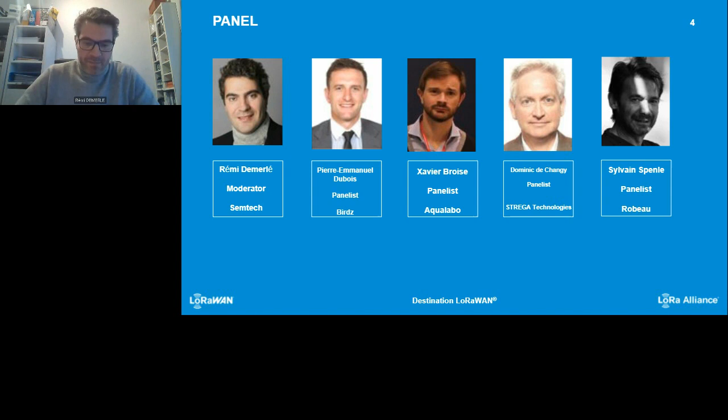Water is a scarce resource for humanity. We are all living on a blue planet, plenty of water, but bad surprise, only less than 3% is pure water. More than this, we think that the most important is drinkable water, but most use of clean water is for food, for irrigation. It's also for energy, also for other washing purposes, etc., in residential or building areas. Last, in industry.

What's wrong with protecting water? What are we doing wrongly? What is the urgency? What do we have to change? That's exactly the point addressed by the United Nations when listing the Sustainable Development Goals for humankind. They call the world to change for safer and more affordable drinking water for all by 2030.

We must realize the fact that 80% of wastewater is untreated, and still 844 million people lack access to drinkable water and sanitation.

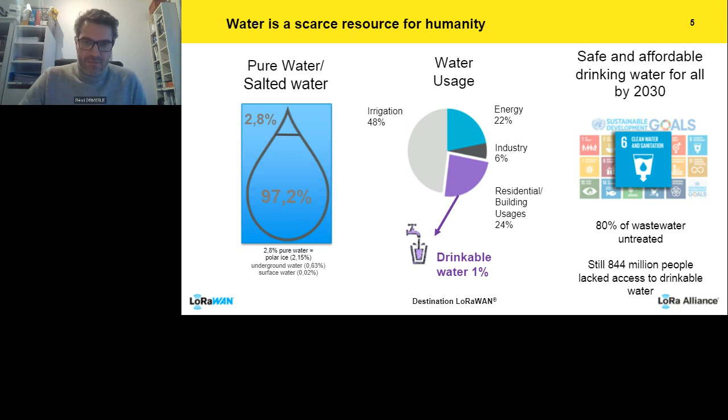So in the next 15 years, if we don't change, this number will increase and reach up to 3 billion. How can technology like LoRaWAN for connecting IoT sensors help us to change that? That's one of the reasons why LoRa was designed for providing better performance to low power water meters used in metering for water, but also for gas and other utilities.

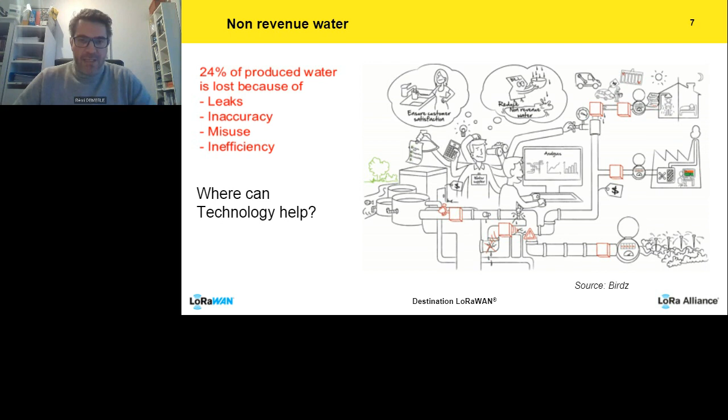Where again can we change and improve this? Through, let's say, an artificial water cycle, not the hydrological one, we try to represent how IoT in different key points can impact for the best the use of water sensors, such as quality sensors for pumps or other pollution control systems or metering systems, water leak detection, etc. All types of new sensors can then profit utilities to improve efficiency.

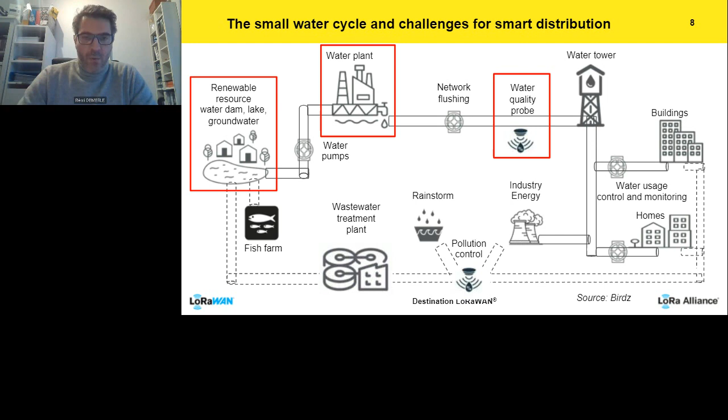Without more delay, let's look at the solution provided by one of the most important players in the sector of water supply, the company Birdz of Veolia.

Thank you very much, Rémi, and good afternoon to everyone. My name is Pierre-Emmanuel Dubois. I'm an international business developer at Birdz. So first, if you let me, I'll share a few words about Birdz' activity.

Birdz provides environmental smart solutions for industrial IoT. As a 100% subsidiary of the Veolia Group, Birdz is the IoT digital center, competence center of the group, serving customers such as municipalities, commercial or industrial companies, both inside and outside of the Veolia Group. Our domain of expertise lies in environmental verticals, monitoring on a daily basis environmental data such as water, temperature, humidity, waste collection, or indoor air quality, and many others.

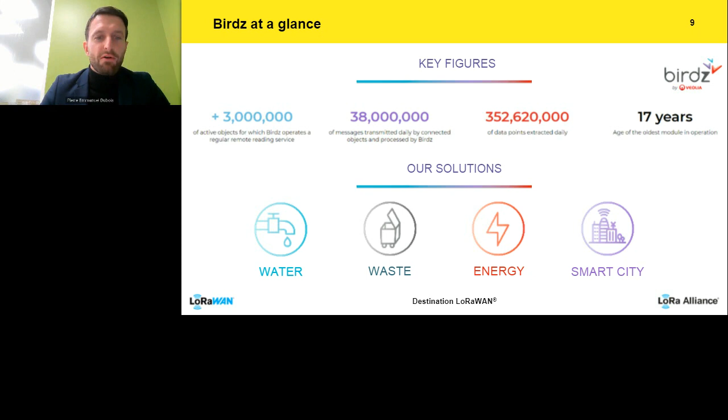We operate more than 3.2 million connected devices every day through various LPWAN technologies, including LoRaWAN. LoRaWAN's fast deployment represents a significant booster for smart water service adoption and enables a more effective water service at a managed cost. Currently, Veolia and Birdz are deploying in France over 3 million smart water sensors in the next 10 years on a public LoRaWAN network through Orange and powered by Actility.

Before going any further, let's have a quick look at a water network and all the process from raw water resource to water consumption. This is called the small cycle of water, which Rémi was introducing earlier.

Step one, the source itself. The water usually comes from surface water like lakes, rivers, or reservoirs, but sometimes it can come from groundwater and be pumped up via wells.

Step two is the treatment. The water then gets treated to remove any dirt, chemicals, or organisms that may be harmful to people. This process involves filtration and disinfection to make sure that the water is safe for us to drink.

Step three is distribution. The water is then sent out through the water pipes network to areas of the cities where it is needed. In step four, the quality monitoring helps municipalities ensure a high level of potability, reduces risks on network incidents, and alerts on contamination.

Step five is the storage. So after being distributed and checked for quality control, the water is stored in water tanks before it's used. And finally, the use, and that's how the water arrives in our taps and showers.

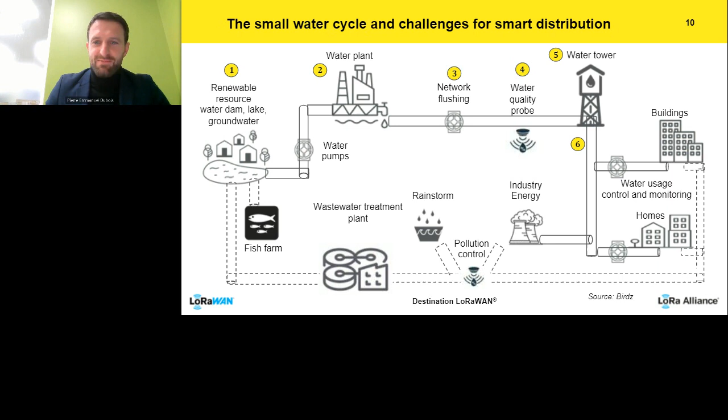How to measure water quality, and how? KAPTA, which you can see here, is Birdz's smart water quality solution.

Monitoring water quality is crucial for water utilities and municipalities, as they have a commitment to permanently deliver a high level of water quality from production to end consumer. The World Health Organization has defined key parameters for the monitoring of drinking water, including conductivity, absolute pressure, temperature, active chlorine, and others.

Why measure water quality? Well, first, to ensure a constant high level of water quality from production to end consumer. Second, to improve the management and the monitoring of the drinking water supply. Third, to reduce the impact of water network incidents. Fourth, alert on contamination. And finally, supervise critical locations as a stepstone for city resilience.

KAPTA is deployed in 12 countries worldwide and protects in France only around 8 million people. KAPTA has been rolled out for large international events or venues such as Euro Disney in Paris for the COP21, and in London in the 2012 Olympics.

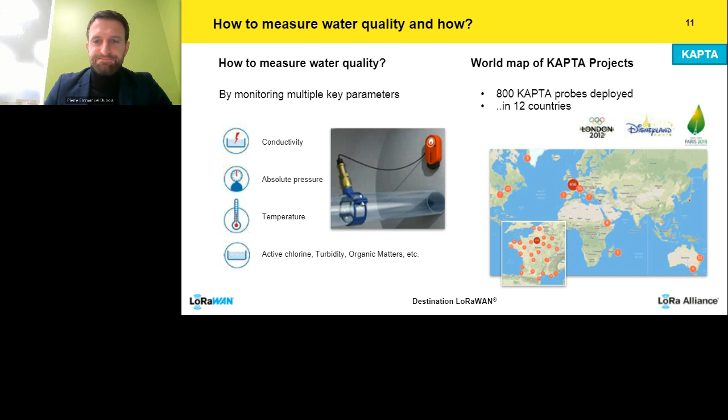The Swarm system is an innovative solution by Birdz for monitoring the quality of surface water. Currently, if you wish to monitor water quality, a sample usually is taken and sent out to labs with the results coming within 3 to 4 days. Swarm, on the contrary, allows you to monitor water quality in real time.

The buoy measures the water quality parameters and transmits data in real time for analysis. On top of the measuring system, the buoy comprises an anchor, a float, and an energy generating module allowing self-sufficiency. The buoy can be installed directly and easily on any type of surface water.

Using the Swarm system, the water supplier can continuously monitor changes in the 7 parameters for the quality and condition of surface water. Hence, deploying Swarm is a guarantee for municipalities to protect the assets of surface water resources, rapidly detect the variation in water quality, limit the economic impacts of any type of pollution, and secure the water resources against

accidental contamination or malicious acts.

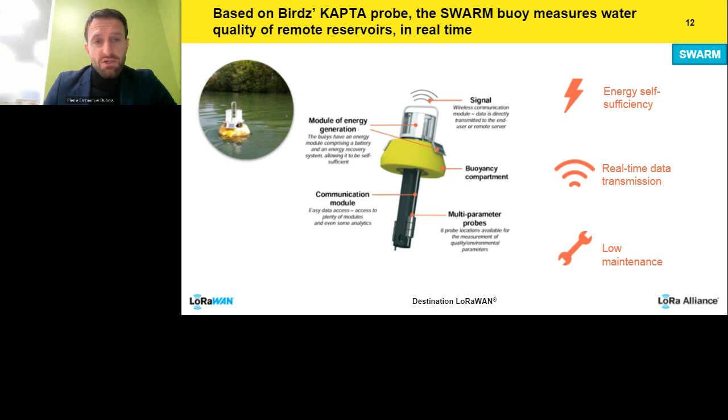Let me emphasize the experience of the Swarm project deployed in Coliban Water in Australia in 2018. This project had 2 objectives. Objective 1 was to measure in real time the blue-green concentration in the reservoir. The second objective was to optimize the downstream water treatment.

The trial with Coliban Water was mainly about testing the buoy in harsh conditions, and it came out with very positive outcomes. First, the model self-learned to account for oxygen evolution at daytime and nighttime. Second, the model has also been able to determine both algal and bacterial concentration.

Moreover, an artificial intelligence model was built to predict how turbidity varies over time, and that model can now predict the turbidity over 30 days. As a consequence, if turbidity increases above the limit threshold, then an increase in chemical dosing is required.

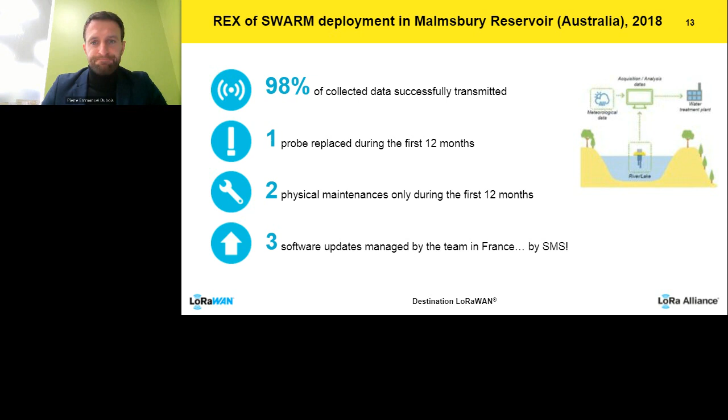In order to support you in the integration and deployment of any LoRaWAN-based IoT project, Birdz has launched to the market an environmental IoT data platform called IoT Drive. IoT Drive is basically a software as a service data integrator and management solution. It is fully agnostic of sensors, regardless of their manufacturers, agnostic of software applications, and of environmental use cases. In other words, it is the Google translator, I would say, of the IoT complexity.

In terms of pricing, IoT Drive comes at a very competitive cost with a yearly subscription fee per device, which is highly competitive compared to alternative solutions. IoT Drive is besides way more plug and play than these alternative platform solutions.

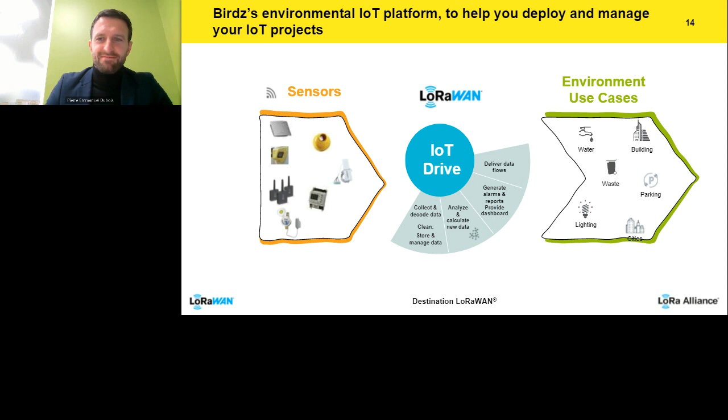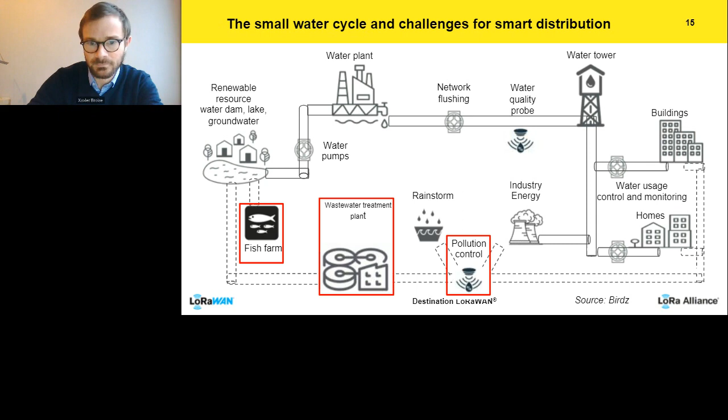Thank you very much, Pierre-Emmanuel, for your explanations about your multi-parameter probe and for this case in Australia. Now let's talk about water quality monitoring and pollution detection for wastewater treatment plants and surface water. So my name is Xavier Broise, and I'm the Vice President of the company AquaLabo. AquaLabo is a manufacturer of smart water quality sensors.

So what are the USPs of AquaLabo sensors? First of all, the sensors are smart. All the intelligence is done inside the sensor. Calibration, compensation, ranges management are done in the electronic of the sensor. So you get a digital signal with a water quality value that you can immediately use for your process.

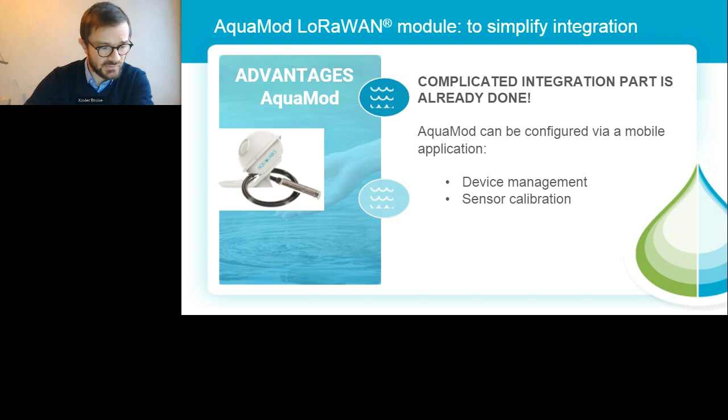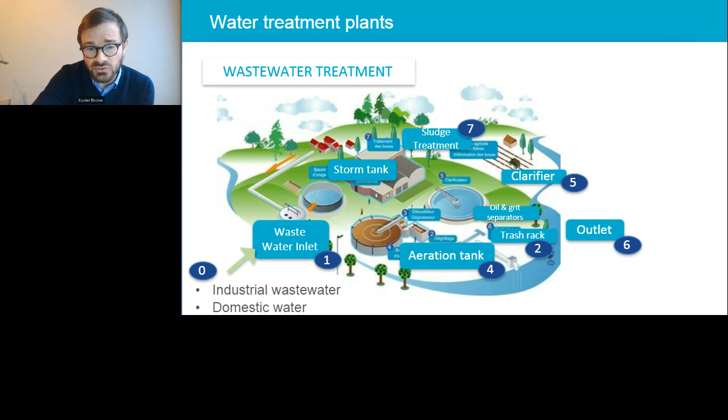So now let's see some application where this package can be useful to monitor water quality. Industrial and domestic wastewater must be treated. As you can see on this slide, the treatment process is composed by different steps. And the challenge is to discharge at the point number 6. So you can see on the slide, the outlet point number 6, a water that fits with the regulation given by the local authorities, and to make sure that you don't pollute the water.

In the process, we will remove the contaminant in the water. So we have physical, biological, and sometimes chemical processes. For each treatment, water quality monitoring is required to optimize and control the process. So for example, in a plant, we will measure dissolved oxygen in order to optimize the blowing system, measure the pH to optimize the dosing of the chemical product.

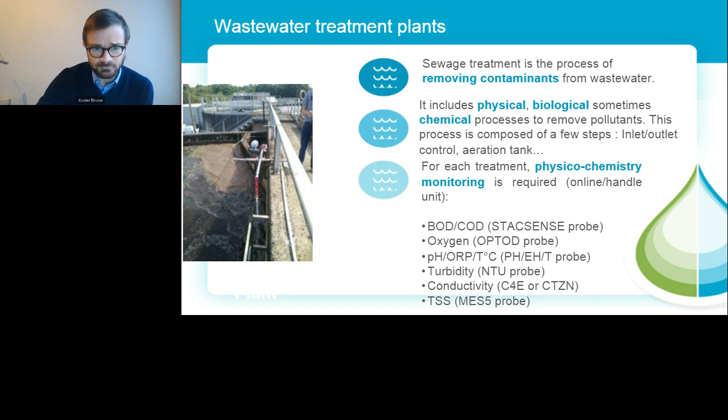Industries also use a lot of water, as we have seen in the introduction, for their processes. And they have two main options for their wastewater management. The first one is to have their own industrial wastewater treatment plant. And the second one is to pay a fee to the local municipal water treatment plant and just send the water to this plant. But in any case, they have to measure the water quality they discharge to prove that they do not pollute. So the rules are different in each country.

For example, in India, CPCB regulations impose the water to monitor some water quality parameters, and this organization has fixed some target values to be reached. At the beginning, in India, this administration was targeting the biggest industry. Now, step by step, they also target smaller industries. So the market for water quality monitoring for industries in India is bigger and bigger.

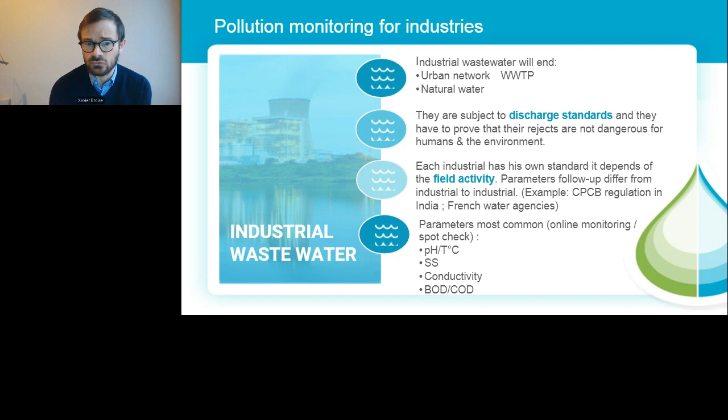In Europe, we have some water agencies. We can call them also police of the water. And each industry must find an agreement with the administration according to their activities, according to the volume of water they discharge, about the monitoring they have to do. So sometimes they just need to install a very simple stationary sampler and take some sample and go to the lab. But sometimes they also have to measure water quality online.

Another very interesting market is fish farming and aquaculture. This market is booming at the moment, and fish farmers may need our technologies for 3 reasons. The first one is to optimize their production process. They need to keep a certain level of oxygen in the water for the fish, and they need to optimize the feeding system. So they will monitor dissolved oxygen and turbidity in order to save energy costs and feeding costs, which are 2 major expenses in a fish farm.

The second one is that a fish farm becomes like an industry because they also create pollution. So more and more, they have to prove that they do not pollute, and they have to monitor their wastewater. And the last point is about the security of the site.

Fish farmers can lose all the production they have and lose all the fish. For example, in the summertime, when the temperatures are very high, the dissolved oxygen in water goes down. So they may need an oxygen sensor connected to a LoRa system to send an alarm, SMS, or an email in case the dissolved oxygen level in the tank is too low.

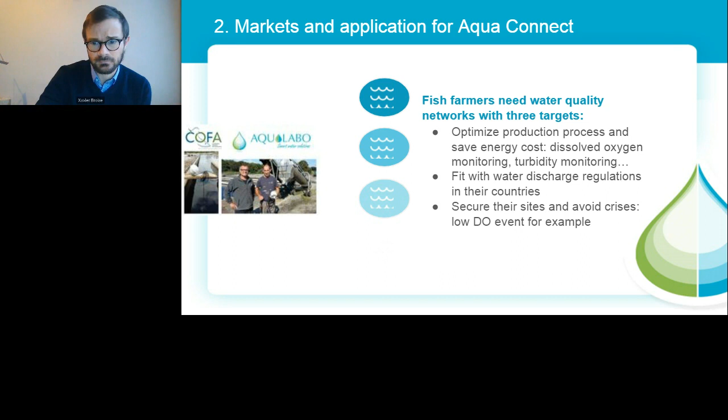Last application is about surface water. As we have seen in the introduction, surface water is sometimes used to produce drinking water. So when civil engineering companies are working in a river, what they do more and more is control. For example, if you build a bridge crossing a river, or if you do a dredging campaign in a canal, you must measure turbidity before and after the work to make sure it doesn't have a bad impact on the environment.

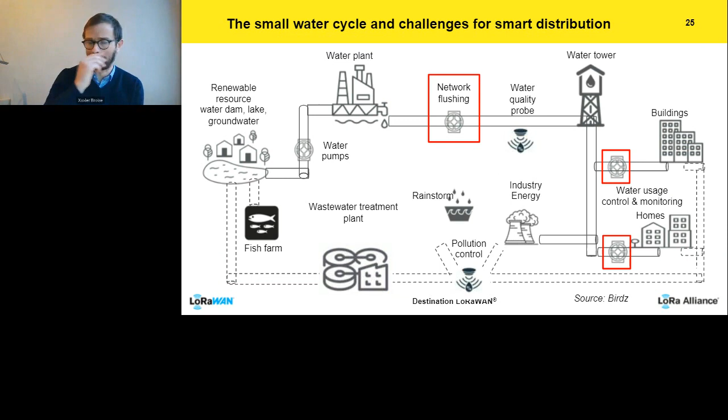Hi, everyone. My name is Dominic de Chargy. I'm the sales director of Strega. We are coming actually from the telemetry business, so we have a long experience with the water environment, but concentrated on LoRaWAN for the last 4 or 5 years.

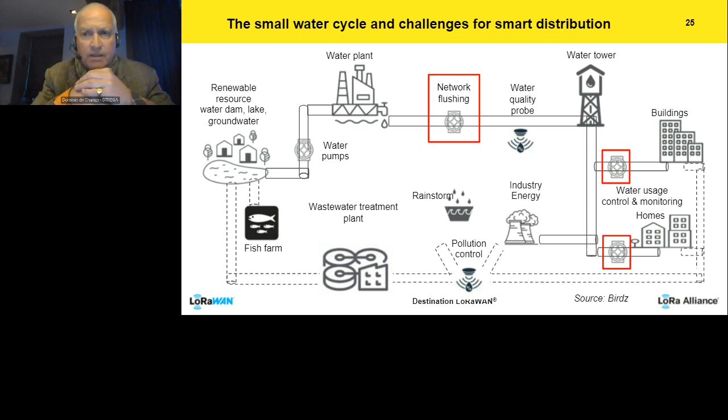What we have developed is the actuator side of the story. So we have developed smart valves, and these smart valves can be installed in many different use cases. This shut-off valve that we produce is leveraging all the power of LoRaWAN, and one of the main benefits everyone knows is extreme range propagation and ultra-low power. And as you will see, we have gone a little bit further by adding several features that are quite interesting for the water and protect water business.

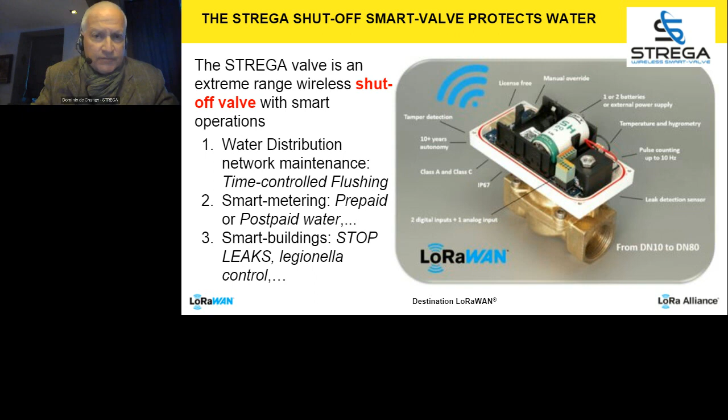So I'm going to give you a few examples of the technology used for water distribution companies. Before we go into that, I will briefly explain what we have developed and why it's called a smart valve. First of all, we have added a real-time clock in the device, which permits automation like time-controlled operation. I'll give you in a couple of slides the example of water flushing.

Another possibility from the device is to make pulse counting. So by coupling the device with a very simple water meter, we can detect every usage, calculating the values and uploading the information of the counter value up to the control room.

We have also some digital and analog inputs. We can control, for instance, the pressure into the pipe. We can detect leakage, and this is another example we are going to explain now.

Now, regarding the consumption, we have a little bit oversized the product. It can work on 1 or 2 batteries because we have lots of requirements to fit what the smart metering world is asking for: 10 to 15 years of autonomy. Most of the projects we have today are running in Class A, meaning running only on batteries. But we also have some other time-critical projects where Class C is requested, and because we are doing a lot of control and what we call downlinks, Class C permits controlling the valve with no latency.

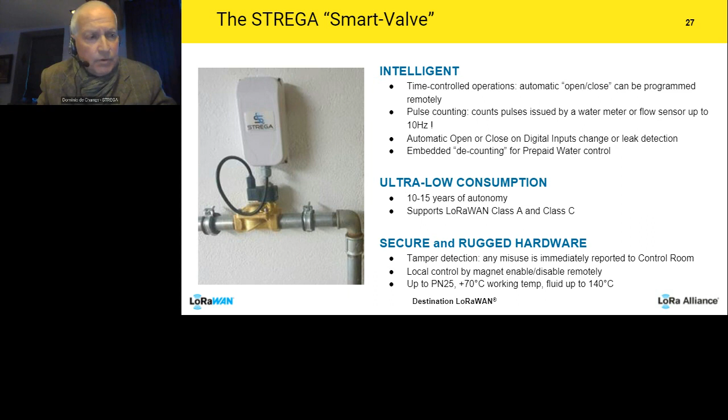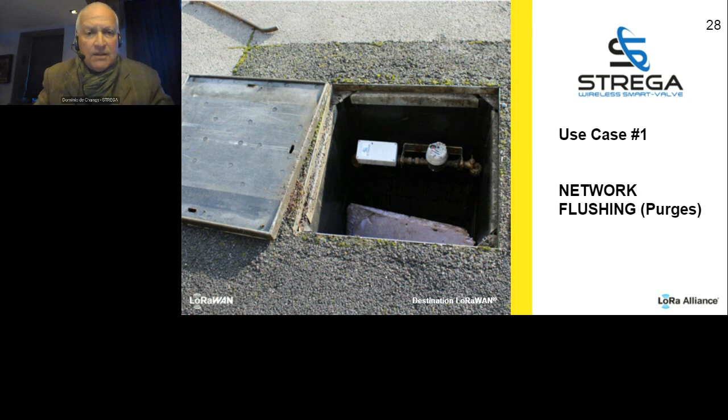Let's talk first about a very common example of the usage of the smart valve: network flushing. Some people call it purge. The idea is the following: if a water company has a lot of pipes all over the city, you may have some parts very far away where the usage is very low, maybe only a couple of houses. If the water stays too long in the pipe, you risk getting bacteria.

Xavier explained how his sensors can control or monitor that. Well, one direct solution that many water distribution companies use is flushing the network, say 10 or 15 minutes per day, to mechanically get rid of debris and bacteria and all potential problems, and the water goes to the trash or to the river. With the time control features of the Strega valve, we can set into the device different timings for opening and closing according to the day and the time, the day of the week, or the time of day.

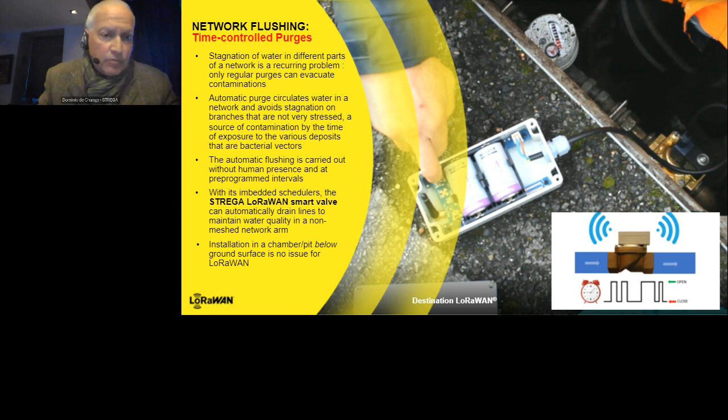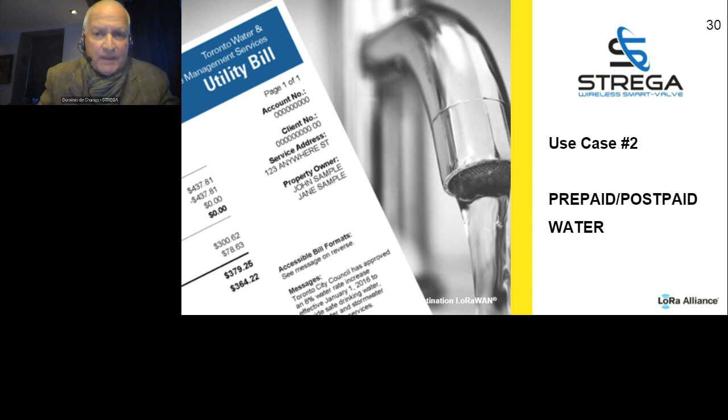Another example of the usage of the Strega valve is prepaid or postpaid water. We see this in many areas, maybe not so much in Europe, but more in Middle East, Africa, and similar countries, where you pay in advance the amount of water you're going to use. LoRaWAN here is perfect for a valve like we produce, because we can detect the number of pulses coming from a water meter, and when we reach the amount of water purchased by the user, after decrementing the value, it will shut off the valve accordingly.

For some countries where closing the valve entirely is not allowed, we also have specific models of the valve where a trickle of 50 liters an hour is sufficient to drink, but not enough to take showers or everything.

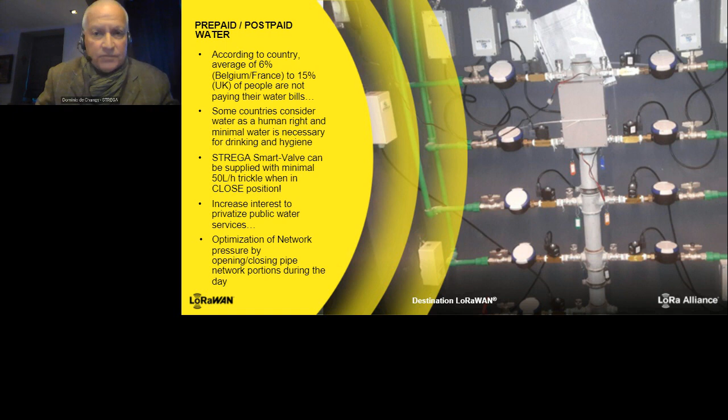The last example is leak detection, where we have more and more demand. The problem with leak detection, or with leaks in general, is that you have way more chance of having a water leakage in your house, according to insurance companies, than a fire or even a theft. So what the Strega valve can do is automatically close the water mains in case of leak detection. This is done through a wired leak detection sensor, or through a LoRaWAN wireless sensor, and it's either up to the application to detect and decide to close, or directly from the valve itself that has this smart feature enabled.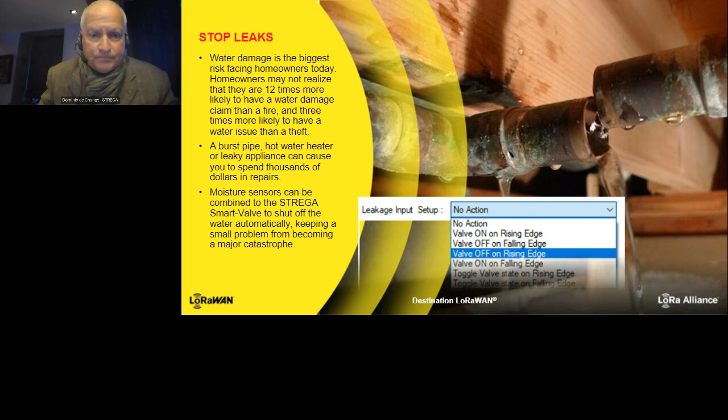So now I leave the floor to Sylvain for the other sensors Robeau is producing.

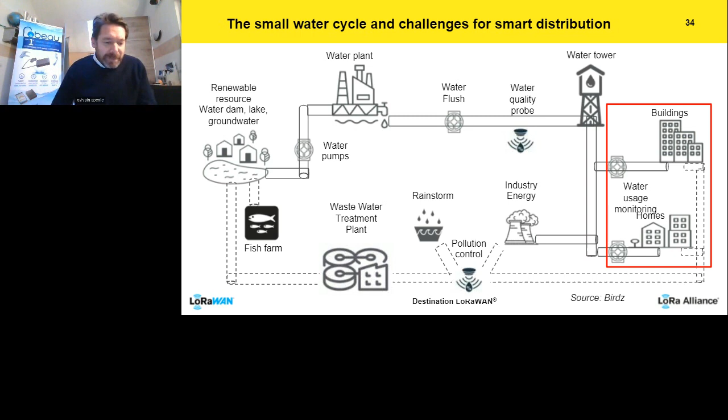Yes, thank you, Dominic, for these interesting business cases about smart water distribution. Now let's have a look at the way to protect water from the end users' perspective. And to start, just a few words about Robeau: I'm Sylvain Spenel, engineer, founder, and CEO of Robeau. We are delivering a turnkey solution to measure water consumption in real time and detect leaks in real time also. We use LoRaWAN protocol to help us cover any kind of structure: cities, farms, and buildings. We are involved in water protection and conservation, and our commitment is to change the way anybody uses water.

Consumers are at the end of the water cycle, and we are convinced that we can help end users use less and less water by changing behavior and by using the right tools, like our solution of course. Indeed, consumers can save water between 20 and 50%.

Yes, it's true. Just by decreasing the number of leaks inside buildings, it's possible to save 25% of water used. Leak rate is about 20% in buildings in France, but can reach 40% in Ireland, where we are, for example, because water pipes are very old there, and there isn't a lot of investment in water networks, due to the fact that there is no payment for water used by consumers in Ireland.

After that, it's possible to save again more than 20% of water consumption by getting people, especially in industries, to pay more and more attention to the volume of water used every day. Industry uses about 20% of worldwide water consumption. At least by adapting and optimizing the equipment used, it's possible to save again more than 10%.

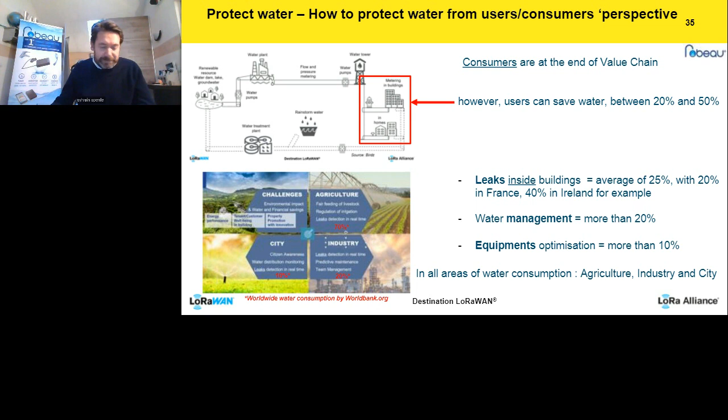So we saw that it's possible to save water, not only to save money, but especially to conserve this resource as long as possible. But there is bad news, because with climate change, studies show that during the last 25 years, water available in the world decreased by 26% and population increased by 36%. The equation is not good.

There are more and more droughts and more people moving from hot countries to big towns. But quantity of water in these towns doesn't increase, and we will have the same volume to spread to more people, so we can't. So it's necessary to start thinking about setting simple rules, because even if today consumers in towns just open the tap and water flows, with these new changes, tomorrow we should change habits.

First of all, we need to raise people's awareness about ways to use less water daily. We need to avoid water wastage, detect leaks as soon as possible, and repair and maintain water pipes in good condition. Easy to say, but not easy to apply.

Just a few examples. In France, water agencies launched a marketing campaign in town to ask people to pay attention to their taps to avoid wastage. It's written on the panel: don't let water flow anymore, water wastage prohibited. In Cape Town, South Africa, after a big drought in groundwater reservoirs, utilities explained to people how to use only 50 liters of water a day per person.

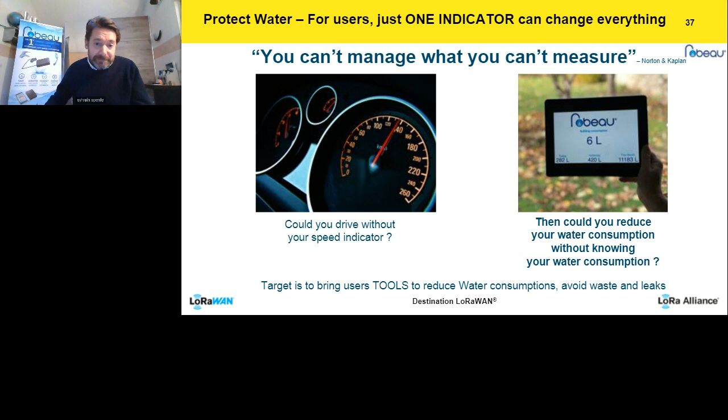So this is the reason why we created Robeau, to provide in real time, everywhere, an indicator of consumption. Simple, but with an IoT sensor inside, connectivity, and a useful platform to read data, analyze it, and be able to act. It's very simple: with the solution, we measure water consumption everywhere sensors are installed.

All sensors send data to a gateway with LoRaWAN protocol, and then the gateway sends all data to the Robeau platform in real time. In the platform, you can see water consumption in real time, the trend of consumption in a graphic, and you can download all data in Excel if needed.

You can compare consumption of different sensors, sum consumption of different sensors to have a global consumption of an area, and you can set up alerts. You can set up a low threshold and a high threshold depending on your need. If the level is reached, then you receive a text message or an email to react immediately and fix the problem. And like that, you can save water.

Just a simple example with a toilet: if the flush is blocked and there is nobody inside the building, it's a common situation now with remote work, without an indicator and alerts, if you let the flush run like this for 1 week, water wastage is about 60 cubic meters, meaning 60,000 liters just in 1 week.

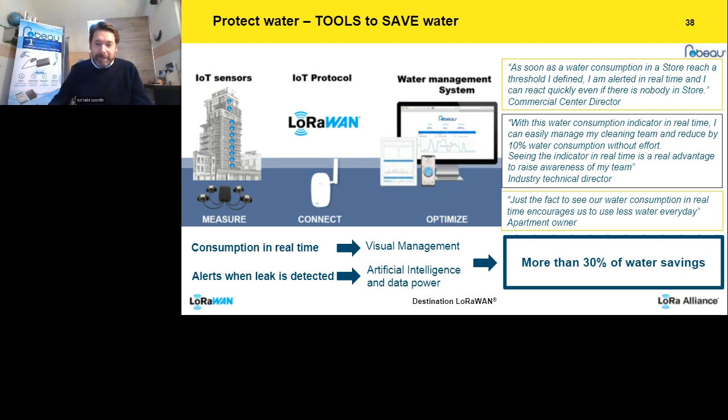So we calculated the savings we did with our 2020 customers only, and it's equivalent to 5 Olympic pools, meaning more than 12 million liters protected and conserved thanks to our solution. And we should reach 25 Olympic pools in 2021. Some examples from everywhere in the world, as you can see in this slide.

In an airport in France, for example, savings are about 30%. We covered the entire airport with sensors to be able to detect any unusual behavior in the water network. As soon as a level is reached by a sensor, the facility manager reacts and goes to see what happened.

Another example: in a building in Paris with 20 floors, more than 100 cubic meters a month are saved. We installed 2 devices per floor, and 3 leaks were detected in a year and fixed before causing a huge claim.

Same thing with a warehouse in the UK. 1 week after the solution was installed, the technical guy received an alert in the warehouse, and it was a leak. The customer was very happy to have installed our solution because he would have lost some goods without it.

In commercial centers in Ireland, France, and China, we help property owners to spread water consumption by store and to detect unusual consumption. We can compare consumption between, for example, 2 hairdressers or fast food restaurants, and help them reduce water consumption when they clean the kitchen, for example.

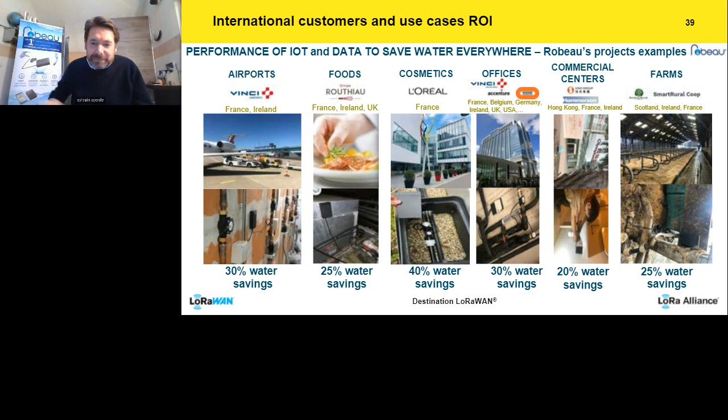Thanks a lot, Sylvain. That was an awesome presentation, and all the panelists were outstanding in sharing their use cases. I want to now take a couple of key points for the conclusion.

What is the motivation we can find when, as engineers or business people, we are dealing with technology? The motivation that can be very inspiring for us is to find better performance, better ease of use, or lower cost versus competitors. But I think that doesn't pay so much for our life.

So if we start using technology for the good of the planet and mankind, that's the ambition of protecting water. Birdz has shown us how the digitization of water network distribution can improve efficiencies. AquaLabo, with AquaMode, has shown new sensors that can help monitor many parameters for water quality. Strega has a sensor to connect smart valves, good for different use cases, to stop waste of water and take action. And Robeau has clearly demonstrated how to empower end users to understand how much they consume and how they can save better and more water.